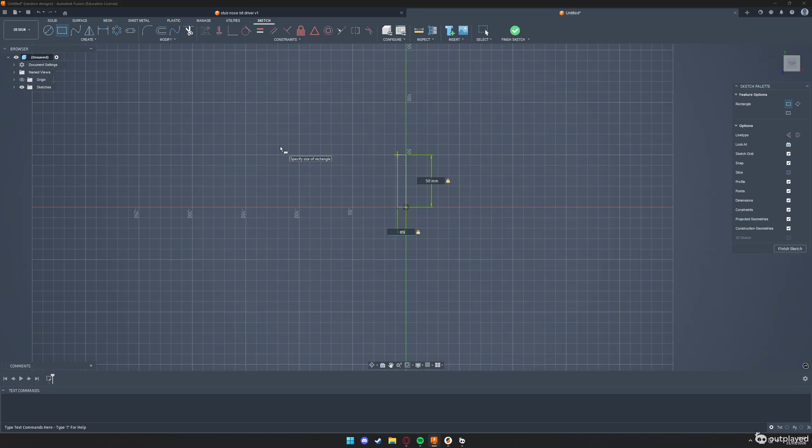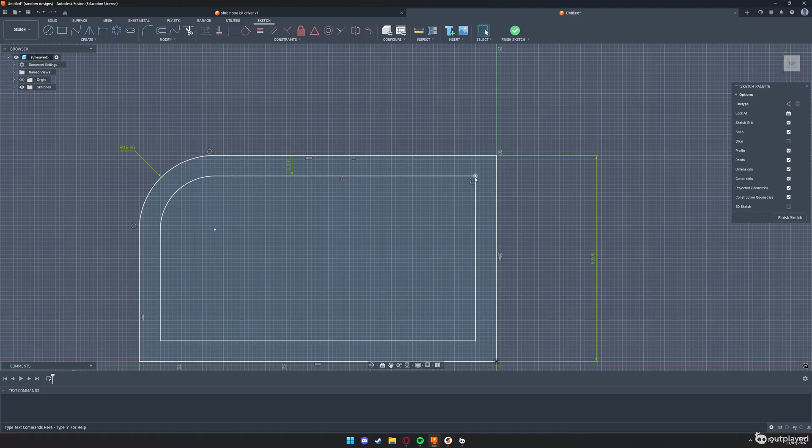And I can add this 18mm. I can now add the wall thickness, which is 5mm, with the offset tool. So if I offset in 5, I now need to close up these two edges. So I'm going to do that with a rectangle. A line would work just as well, in fact better. I'm going to select all of these and extrude them up by 5mm.

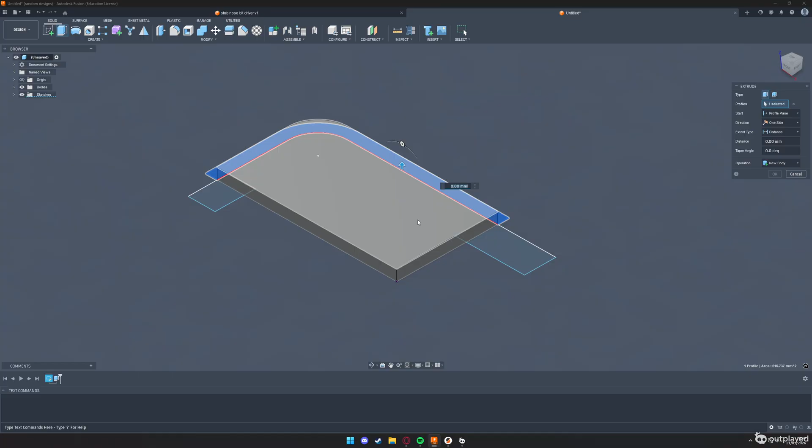Now I'm going to select the outer edge and extrude that up by, how tall is that? 23.6. Okay, now you can see there's a bevel here, which is a radius of 8. So I'm going to use the press pull tool, 8, and that gives me the bevel.

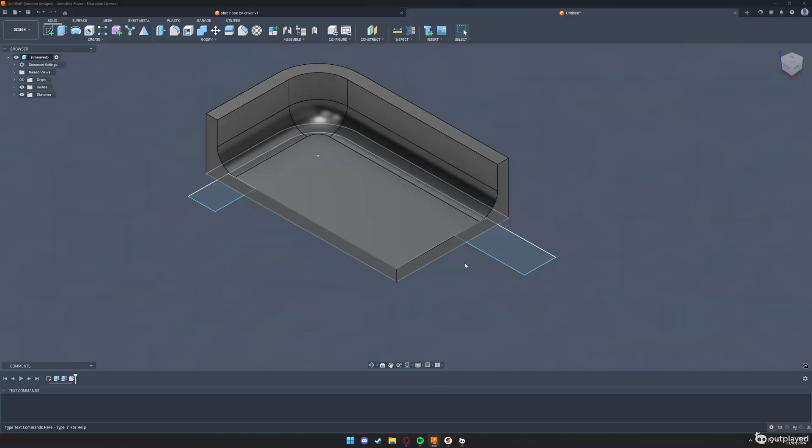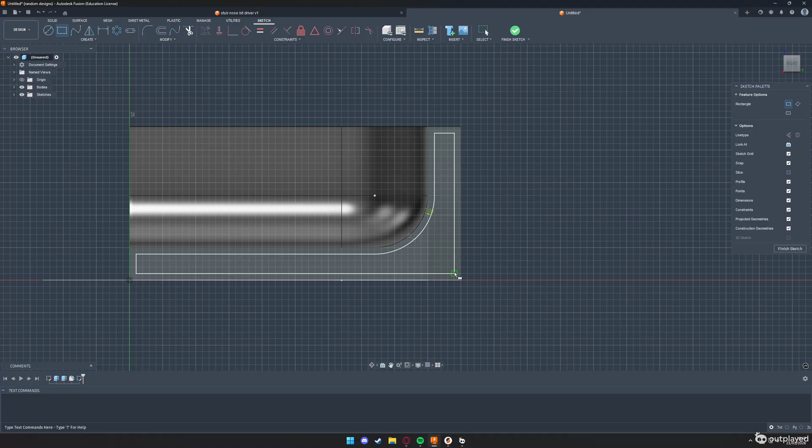So now comes the slightly tricky part, which is the lines going straight the way through. You can see they do go down the outside edge. So I'm going to sketch on this plane first. I'm going to create an offset, and how deep are they? They are 1mm deep. I'm going to create another blocker here. So now when I select this, it doesn't select all the way around, it just selects the bit I want.

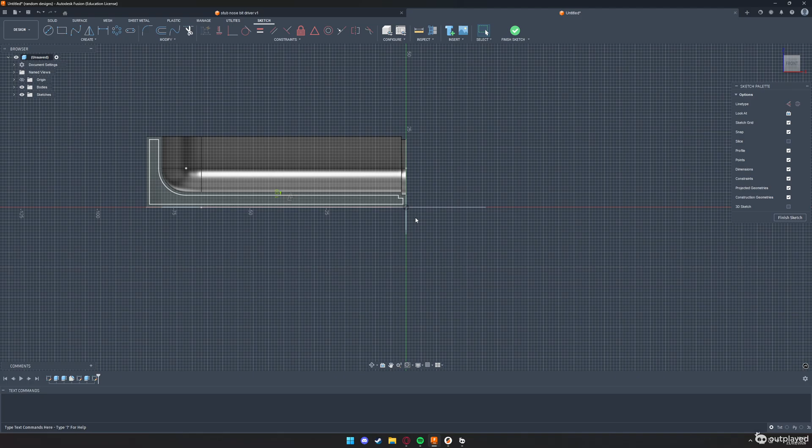And I can now extrude this into the model by 1.5 millimeters. 1.5, minus 1.5. There we go. Now I can do exactly the same on this side, which will offset it by -1. Create another line there to block it, and extrude this in by -1.5.

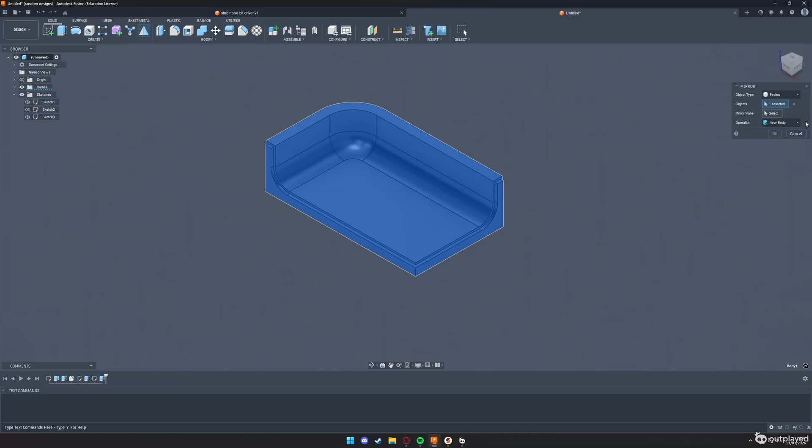Okay, let's tidy up these a little bit. Now let's mirror. That's 1, and let's go again to there. So this is the rough shape without the extra lines.

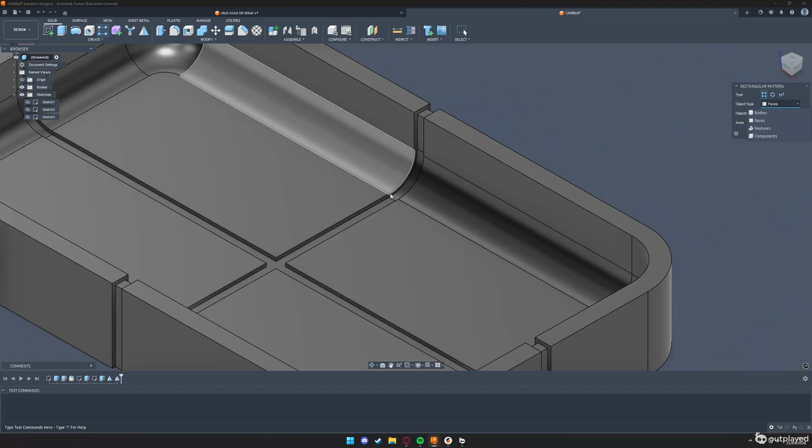What I can now do is use the rectangular pattern, set it to faces. Features won't work because the feature of this is only 1.5 wide. So I'm going to select every face I want to mirror apart from this center one. If I do this center one, it will extrude all the way out there, and most likely it will cut straight through this side.

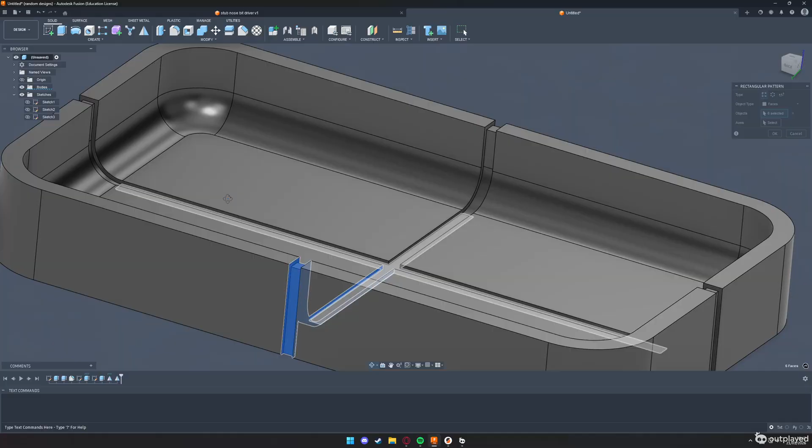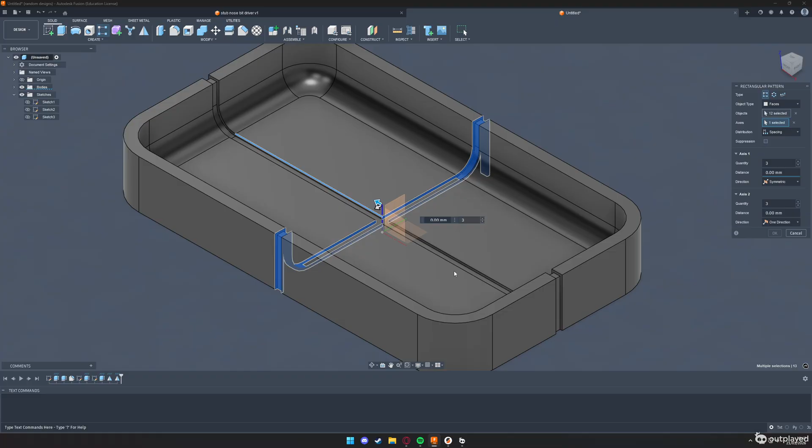So select these faces. Select the axis that I want to pattern, and I want to pattern this direction, so I'm going to select any axis that travels that direction. So the spacing is 20 center to center. So I can do symmetric here, as I want it to extend both directions, and I want the distance to be 20. We can see 3 isn't going to cut it.

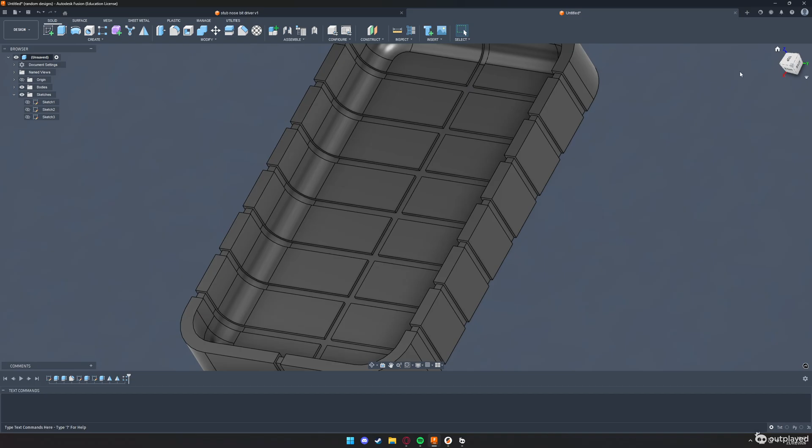There are 1, 2, 3, 4, 5, 6, 7 here. So if I swap this up to 7, perfect. And if I click OK, there we go. Now I can do exactly the same for the ones going this way. Pattern, rectangular pattern. Select all of the faces apart from this one, because again, if I do this, it will remove the solid body between these two faces for every single pattern I've just done.

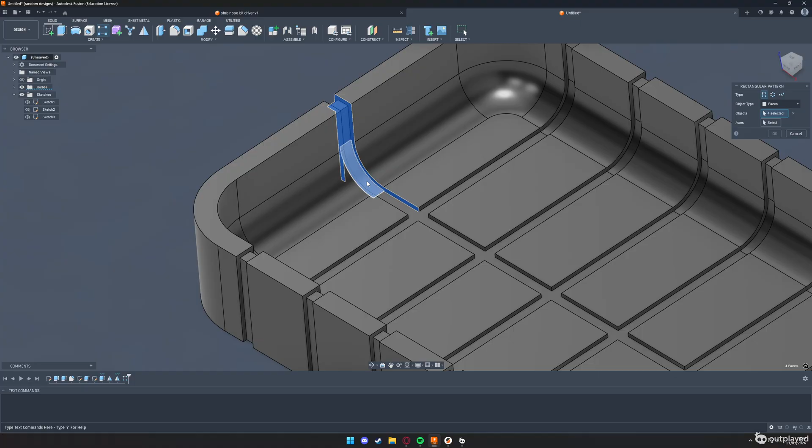Alright, now I can select the axis. I want it to move this way, so I'm going to select any axis going this way, and we can see there are 3 different things. Symmetric, and I want the spacing. Is that on spacing? That is on spacing. I want the spacing to be 20 millimeters, which, yes, that is right. It doesn't give me a spacing for those ones, but 20 millimeters looks about right.

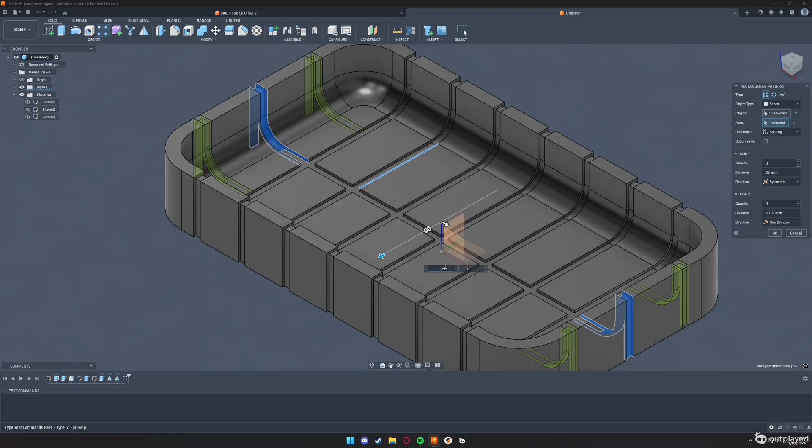In fact, no, it doesn't look about right. 25. There we go, that looks better. It does give me the spacing right there. I was just being really, really blind. Okay, and if I click OK, there we go. We've got the ends. Now I need to make the grooves that go through here and here.

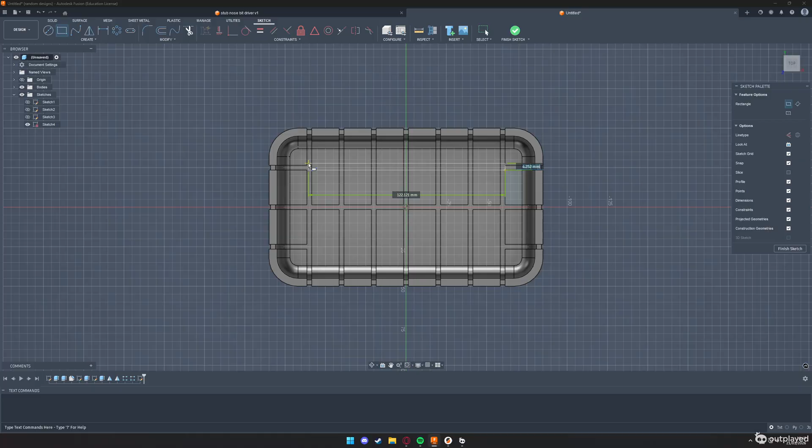I can do this very easily by sketching on this face, which will allow me to snap here. And I want that to be 3, which is the width of the groove. And then will it let me? It will let me snap down here. So I can set this length to 3, and then this one just extend, not all the way past this line, because that's where the radius starts, but just somewhere along here.

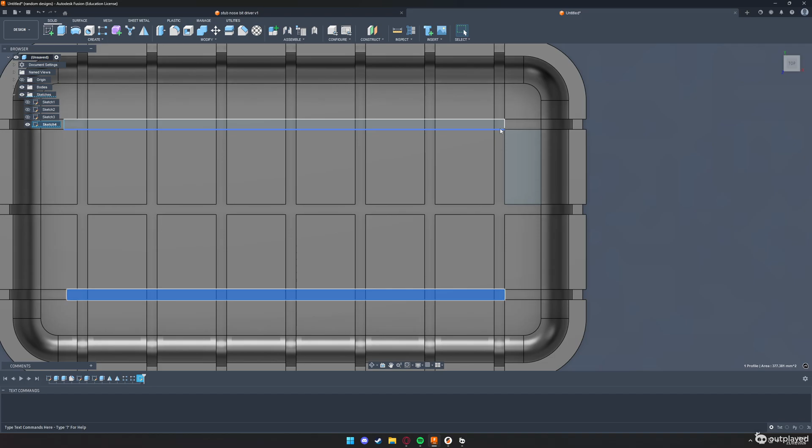Finish sketch. Now I can extrude both of these down to meet the rest of it. And that should be the finished model. Make sure no cuts on the bottom. And that looks pretty close to what the drawing is.

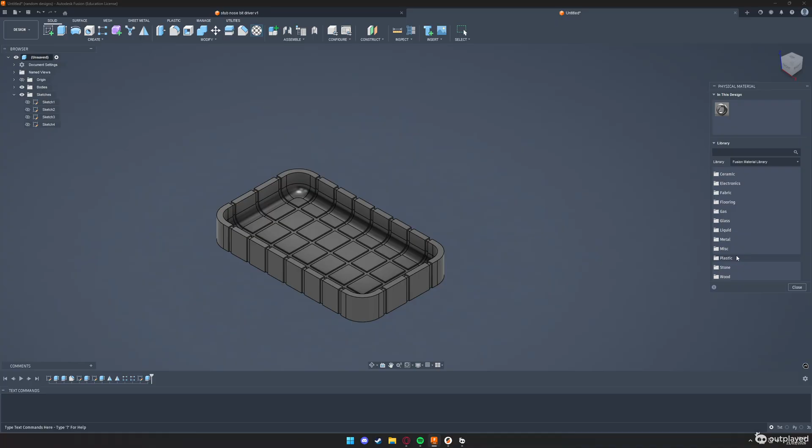I need to set my material to, where is it, plastic, ABS, and make sure that my density is correct, which it is not. So that should be 1.02. Apply this, and OK isn't going to work because Fusion is a bit stupid like that. So cancel, make sure it has set it to 1.02.

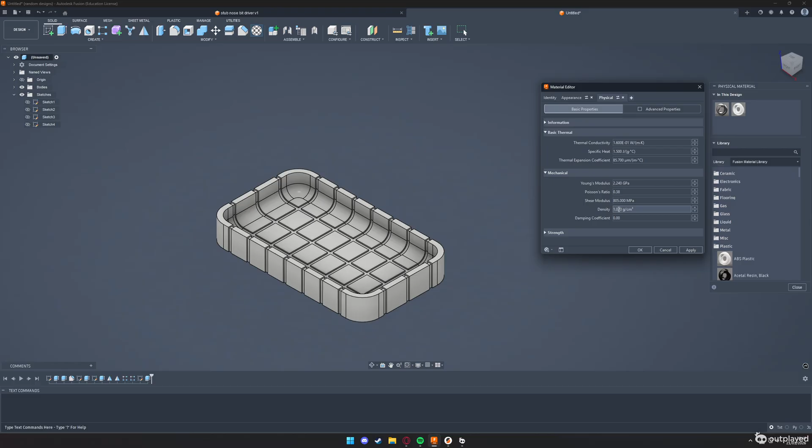And then let's get the mass, which should be 132.811. Copy that, 132.811, submit answer, and that is right. That might have been a bit fast for a tutorial, but I think I was clear with everything. So yeah.